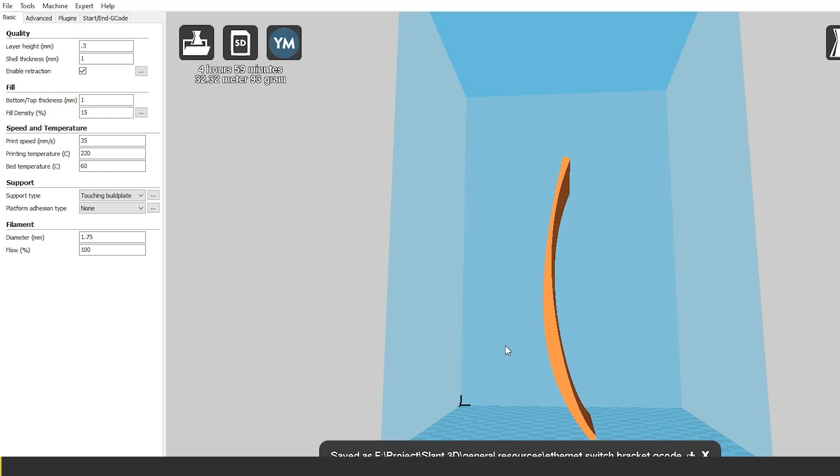This part is really, really challenging to make. The reason being is because it's so tall and thin. Now this one actually has a little bit of forgiveness in it because if we look at the layers, we could actually support it from the bottom, but you have to have some sort of support spacing here in order for the support to be removable. You can't have the support embedded in the part.

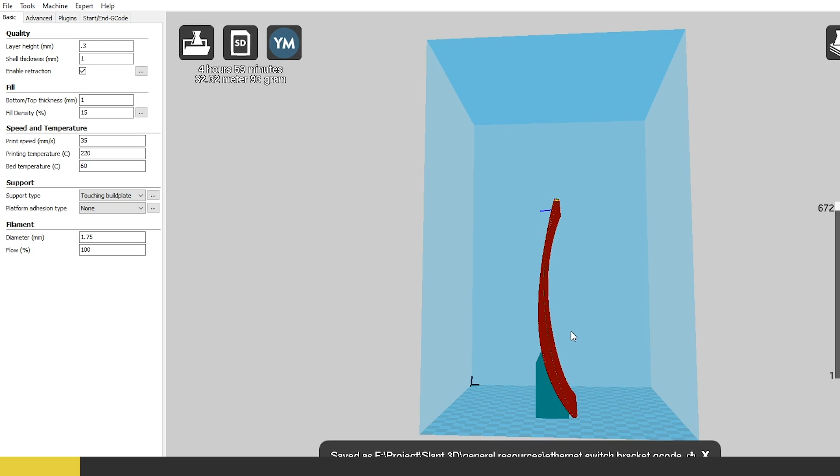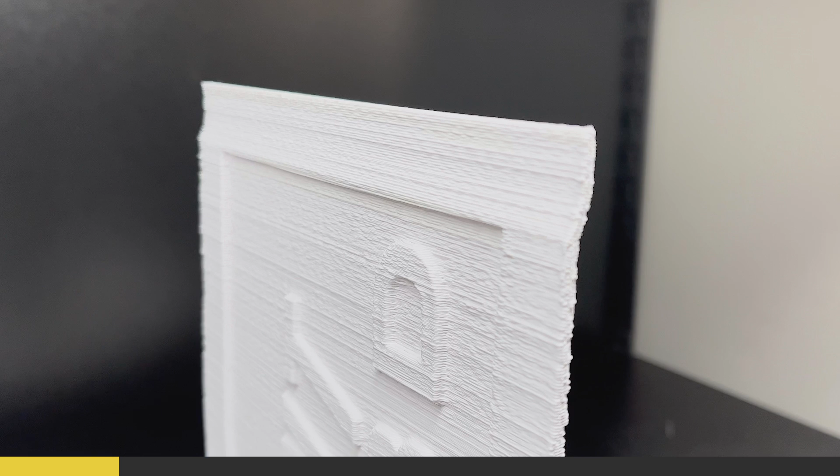And this also doesn't work for very tall, thin plates that might be perfectly vertical to where support can't possibly generate. So how can you possibly produce this part without having a ton of Z-banding and wobbling near the top, especially on something like a bedslinger printer where this thing is zooming back and forth? Ideally, you have a better printer than that, but if you don't, the other option to address this is with what is called support combs.

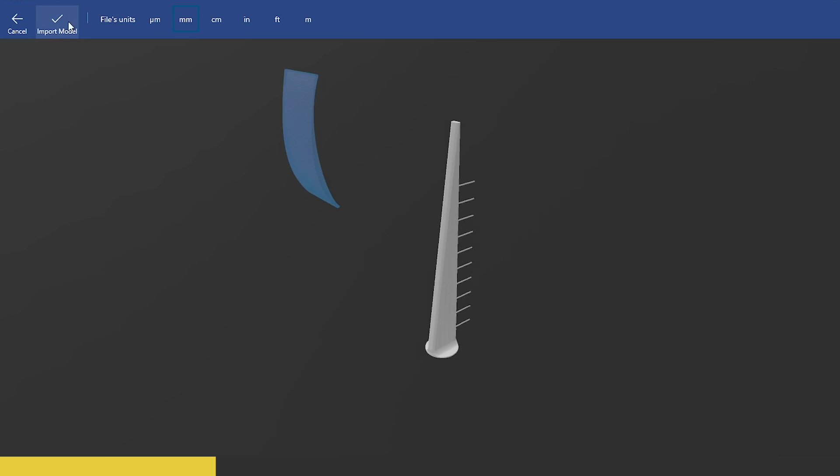Now, a support comb is something that we'll create inside 3D Builder here. It is an external STL that we're gonna bring in. And actually, here it is right here. This is a basic support comb, and we'll actually share this file over on our Patreon.

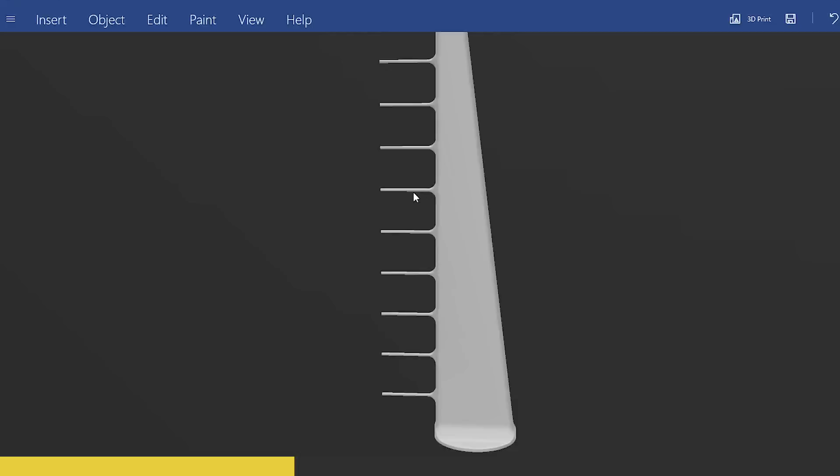But you can see it is a vertical post with a wide base with several small sprues coming out the side. These are 1 millimeter in diameter because that's the smallest reasonable size for most 3D printers, and they are perfectly horizontal, which means that as the nozzle comes around, it will travel out to the end of this and then come back, and you'll have a small kind of thread or finger sticking into the part.

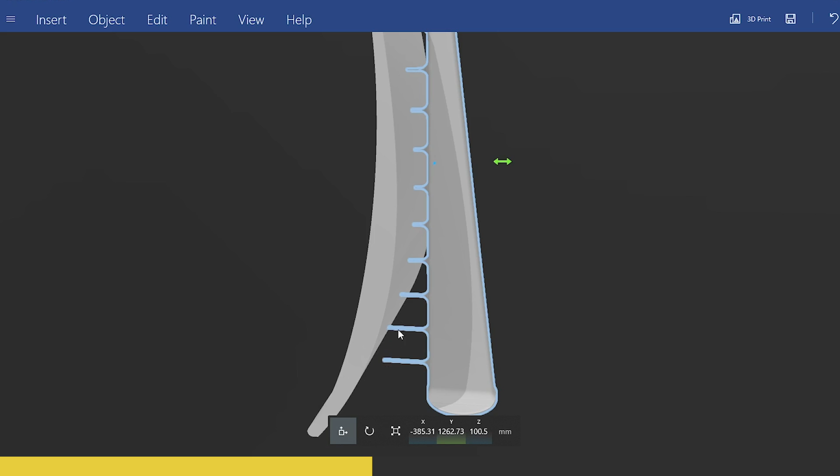So in order for these to work, we first pull the part into 3D Builder, and then position this where we want it to be. You want it to be as close as possible because obviously you don't want flex anywhere in here. And these fingers are made to be extra, extra long so that they can reach out into these weird curved parts like this. But the issue is that now you have these fingers sticking out the other side, and we don't want that. We want this to be perfectly contoured with the part.

But first thing we're gonna do is we're gonna get this comb shoved in as close as we can. We do not want it all the way up to the top of the comb. You want to have a little bit of just finger there, and that will do us quite well. All right, so I'm going to copy that plate, and it's going to move exactly a single axis over, and then we're going to go up here to edit, and we're going to subtract that plate from this part.

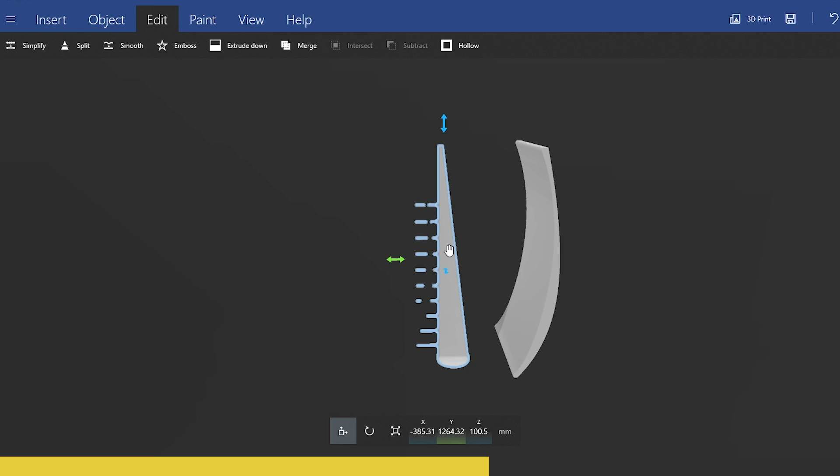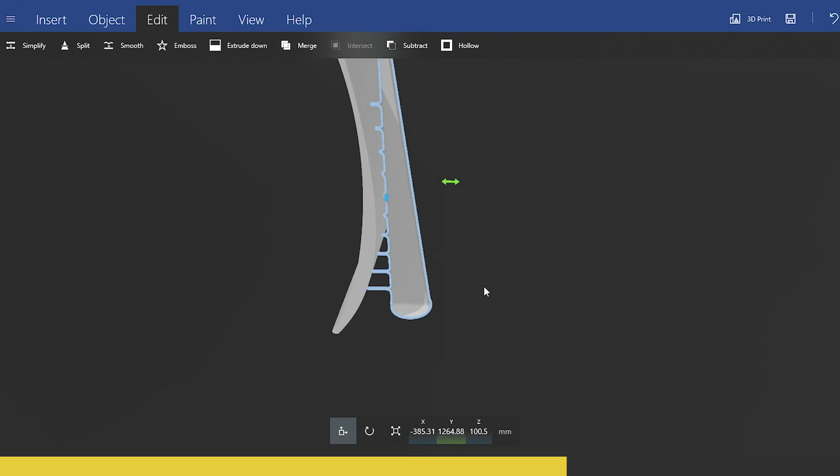And now you can see the fingers have been split based along the profile of this part, and we're going to get rid of the opposite side, and then we're going to take this and move it back into position. Take the duplicate and move it into position. Just like so. And then we can take this and shift it in just a little bit to make sure that those fingers are sinking in because it was cut along the profile. So you want to go a little bit further. And now we can go ahead and merge these two parts.

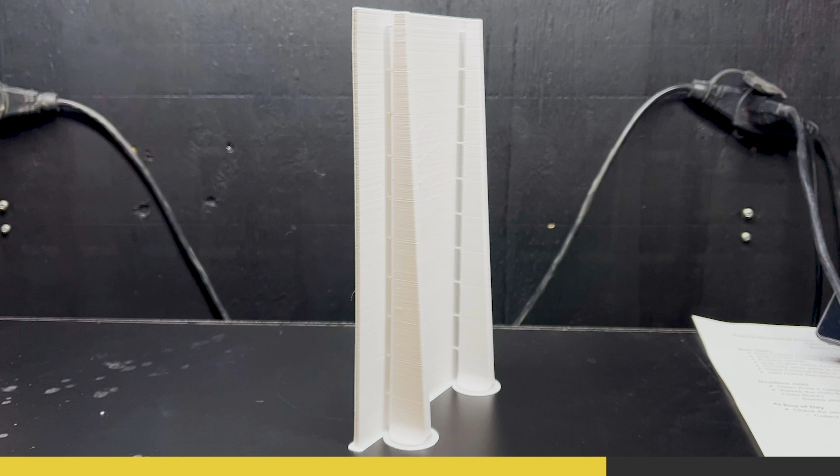And now you have a part that has support all along the side. It has this single pillar, which is a piece of structure, and then these really small sprues going into the piece that can then be snipped off with flush cutters from the outside. And we use this for a number of different kind of tall, thin parts in order to allow them to be printed reliably and quickly and in the same plane as the layers themselves without having to be laying flat.

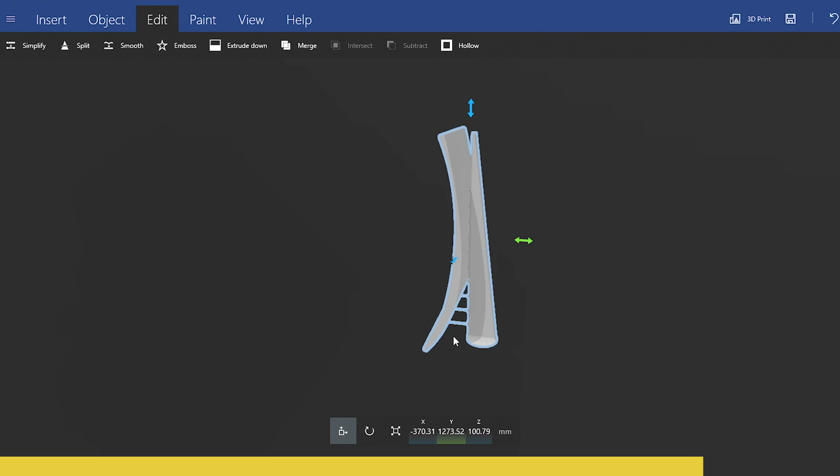It improves the surface finish of the part because it doesn't have to be some large flat side on this fin. It can print up from the small area, and then you just have a few small pock marks, very similar to like resin prints, that appear on the outer surface. And if you're using PLA, you can hit those with a heat gun and they will basically disappear.

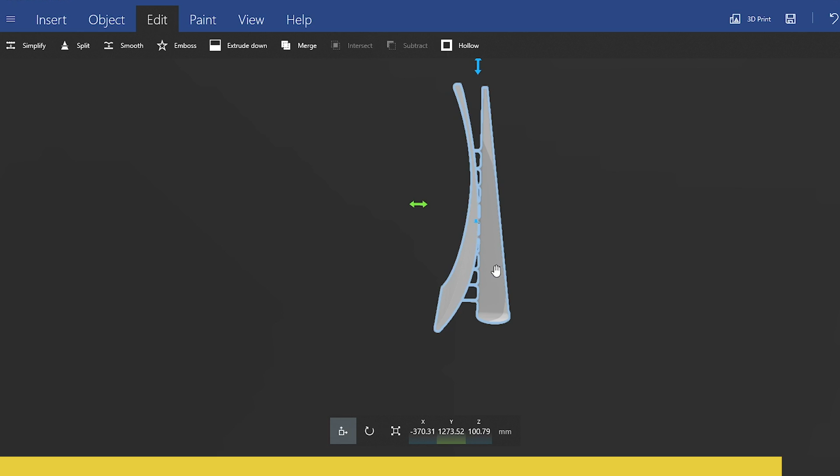So hopefully this helped you. And this is a solution for supporting very tall, thin parts without actually having to have support or having to re-engineer the part in some way. It's a very quick type of disposable support that can be engineered to the part itself.